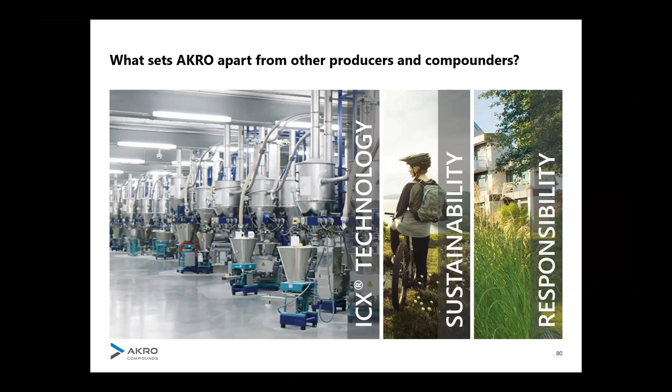The third and last topic I'd like to mention is the ICX technology. ICX technology is our in-house technology to compound, and this is the same in every location, every production site we have. We are running on the same lines in China, in Brazil, and we will run on the same lines in the US. The special thing about it is that these extrusion lines are produced by our sister company, Feddem, so they are also tailor-made for our needs, for our materials needs, and for our customers' needs.

Okay, so that's for AKRO. Now I'm happy to share some interesting new serial applications. When I was asked by Houston if I could give the presentation again, I said okay, I'll just take the old presentation which I showed during Chinaplas. But then I realized that in the last 6 months, maybe a bit more, we had so many new great applications that I'd like to share with you, so I had to do more or less a completely new presentation.

One very important field, and it was already mentioned before, is battery electric vehicles. It's like a perfect match, polyketone and battery electric vehicle applications, and there are good and many reasons for that. Looking into thermal management of a battery electric vehicle, it is completely different from a combustion engine.

In a combustion engine, you need more or less to cool the engine while the car is running, temperature control the engine. In a battery electric vehicle, you also need to take care of the temperature of the battery while it is standing outside in winter times, so it must not go below a certain temperature. You must control the temperature in your fast charging unit, and you must control so many different converters, inverters, and on top of that, the heating, ventilation, air conditioning.

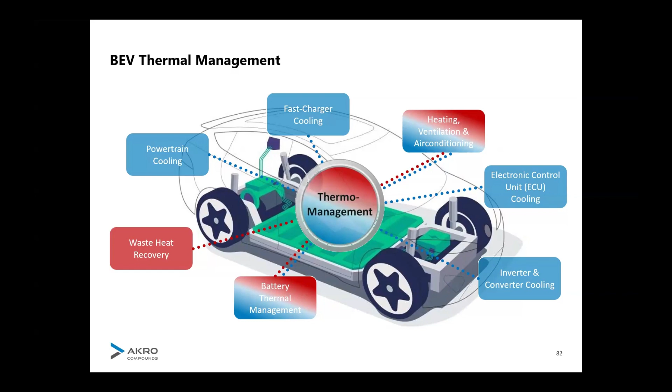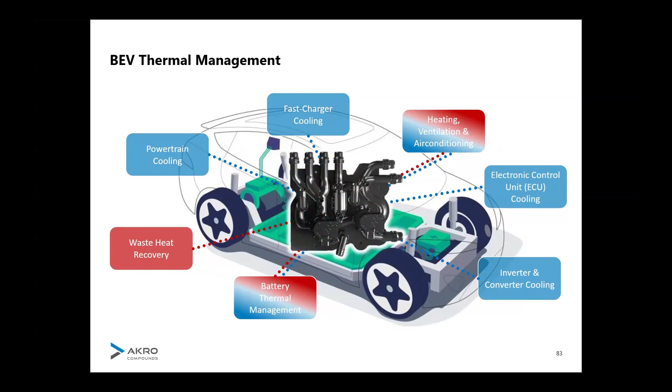So you see immediately that there are many jobs to be done, and therefore you have very complex modules. They need to be very highly sophisticated because you do not want to cool or control all these different components at the same time, because you only want to control what is really needed to not waste energy. And therefore you have these manifolds, and these manifolds are quite complex parts. So many of them are made in semi-shell technology, where you have two layers or one base plate, and you weld different channel components on top.

And then you can use different welding technologies. You can do laser welding, vibration welding, ultrasonic welding, whatever, depends on your part design. But what you will get in the end are weld lines somewhere.

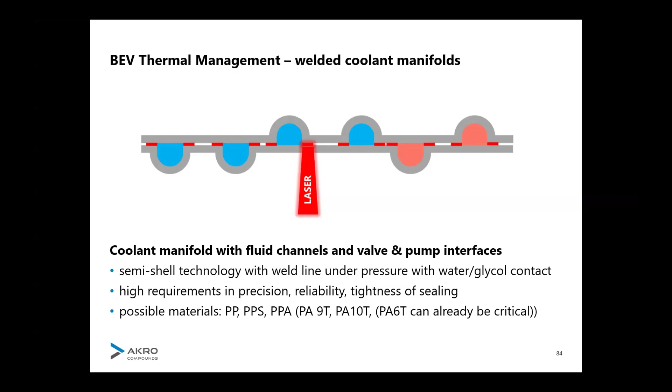Weld line in combination with temperature, in combination with the cooling agent, and over quite a long lifetime, you have in these parts really high requirements regarding precision, reliability, and of course the tightness of these weld lines.

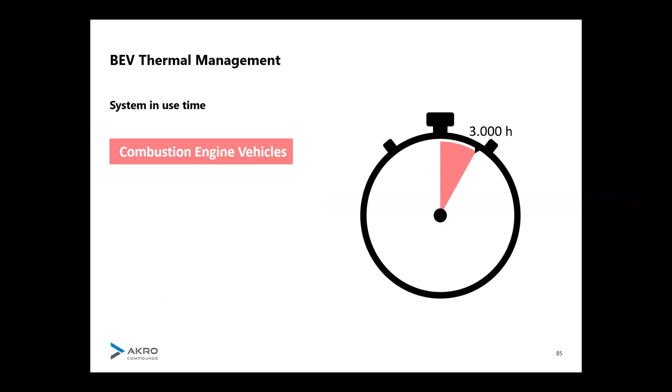I already mentioned the system in-use time in a battery electric vehicle is much different from combustion. In combustion engines we test for 3,000 hours. Now if you look into battery electric vehicles, 15,000 would be nice. They go even to 30,000, which is already 10 times the in-use time compared to a combustion engine.

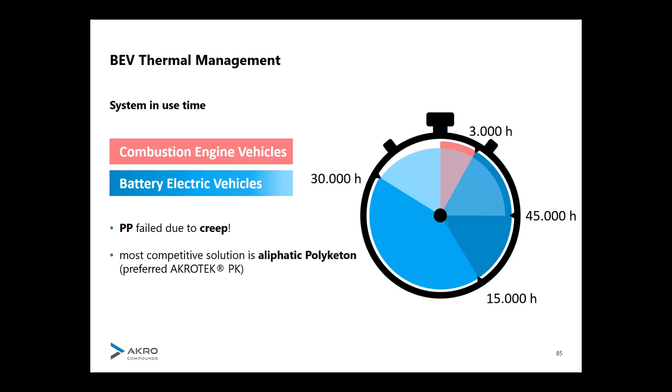Therefore, we see polyketone as the most competitive solution, and I can give you a recommendation, use AKROTEK PK for these kinds of applications. So we heard already a lot about hydrolytic resistance, about the test results.

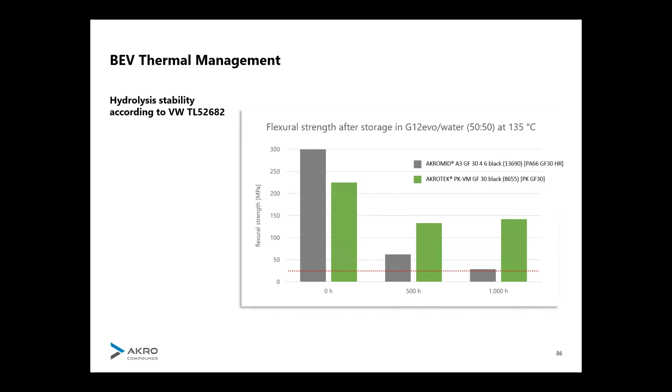I'm glad that the numbers we saw so far match with what I prepared, but we do not need to go through this chart again.

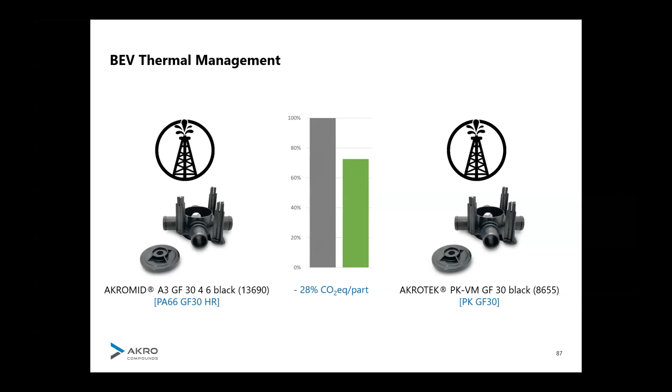Another topic that is often discussed and that reflects kind of a fear of our customers is the cross-linking behavior of polyketone when processed in an injection molding process.

We use the injection pressure as an indication for the change of the viscosity, and this reflects the cross-linking behavior in the mold. In the beginning you were quite on a similar level, and then we started to increase the dwell time just to make the material suffer a little bit more under temperature and to activate the cross-linking process.

And we could see by increasing the residence time in the injection molding barrel, this is standard polyketone, it really goes up a bit, and you can even do it further. We had a stable condition here, and then we increased it by another 5 minutes, and it went even higher. So there was quite a logic behind it.

So we were able to develop our own stabilization package for polyketone. As you see, it increases a bit, but compared to an unstabilized polyketone for the processing, we were really able to reduce this behavior. And that is really well appreciated by customers.

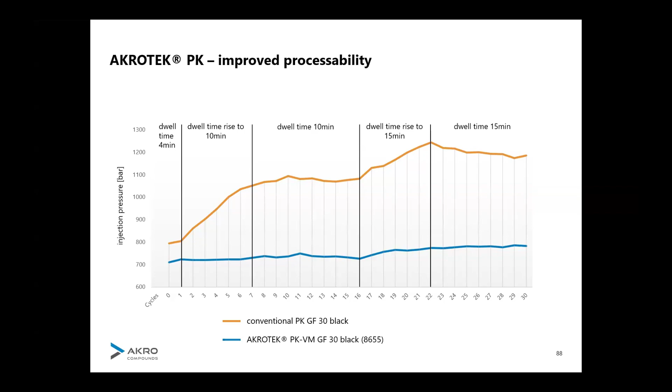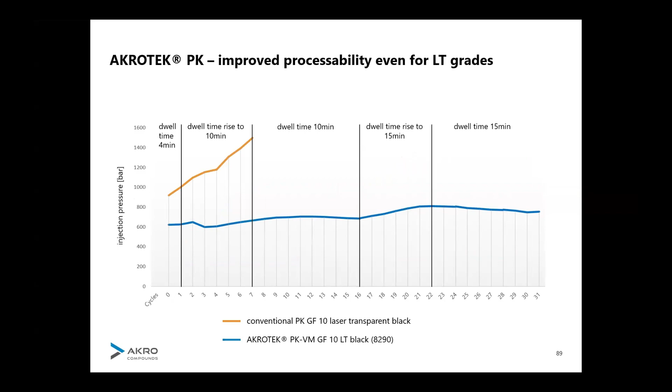And this is not only working for standard grades, but it's also working, for example, for the laser transparent grades we also use, especially in these kinds of thermal control units.

Okay, now coming to real parts. This part I was not able to bring today, but you can see it on our booth in Hall 6, because it is attached to the booth. This is a very complex thermal control unit.

Well, we explained what is the task of this part, but what are the values for the customer. First, by bringing all this together in one module, we have a strongly increased energy efficiency, but also installation space efficiency. And this was tested for a lifetime of 30,000 hours.

And we see here we were able to bring 26 connections into only one part in the end. And of course, it's easy to acknowledge that this is a much more sustainable solution already material-wise, and also compared to different materials like nylon 6,6 or even more expensive grades like PPA or PPS.

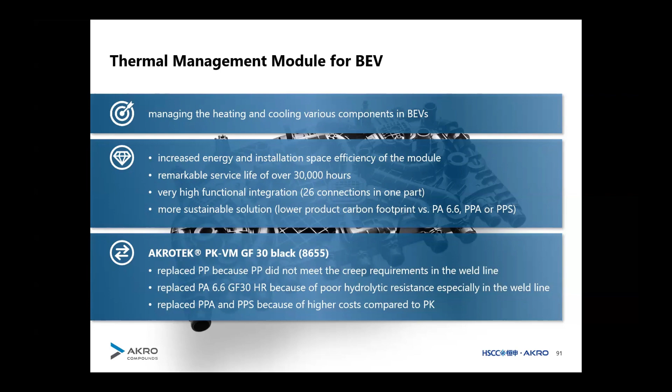So yeah, we use here a 30% glass fiber reinforced polyketone, and in the beginning the idea was to make it in polypropylene, but it simply did not work because of creep. And with all these many weld lines, over the long time with temperature, you also get leakage when using a nylon 6,6 glass fiber reinforced, and PPA and PPS would most likely work, but it's simply more expensive. So you go for the polyketone solution.

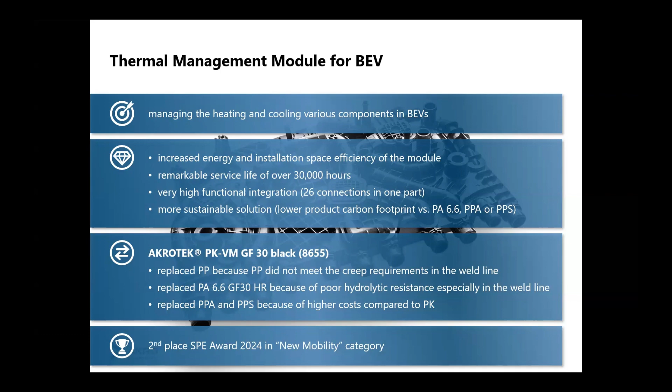This part won the SPE award last year. No, it was in second place, sorry, in the category new mobility. And now just last Monday, so about one week ago, this nice part here won first place at the SPE award in the same category, new mobility.

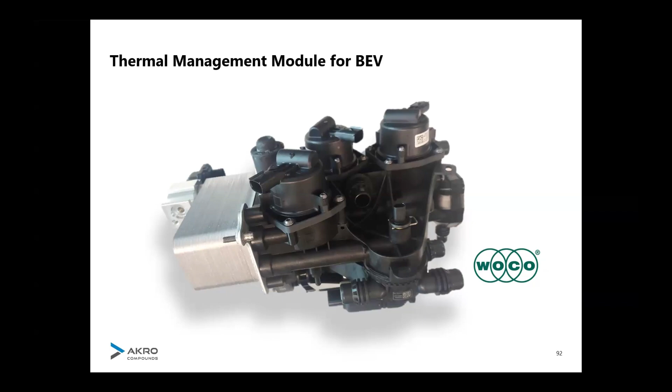It's also a thermal management module. It's for the Lucid Gravity. So, you know, before, the first car was the Lucid Air, and I will show you later what the solution was in the beginning. And now you already see the next step. And so here we have the same function. We replaced 11 parts by one part.

And the weight saving, and that is interesting, is not only coming from reducing parts, making it smaller, but if you look at the whole system in your car, of course, if you have less components, you have less tubes in between, and you have less cooling agent that you need in your whole system. So looking at the weight saving of just the part, we talk about roughly 30% saving, but on top, you could eliminate 10% of the whole cooling agent in your system. I don't know the exact numbers, but imagine you had 5 liters before, and then you have only 4.5 liters left. You already save 500 grams just in cooling agent.

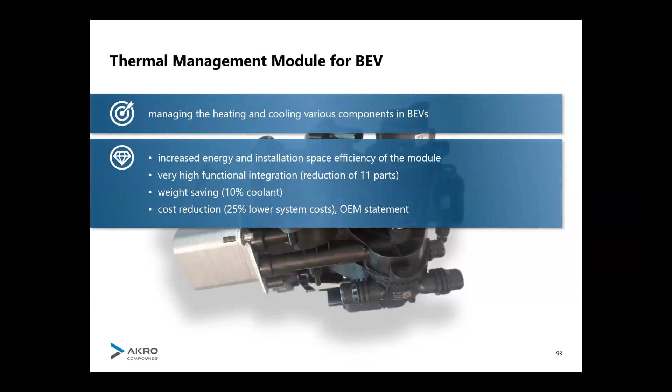And another interesting number was the cost reduction of the whole unit in the end. And that is a number we received from Lucid as an OEM. So it's not so often that you get this kind of information. They were able to reduce cost for the whole system by 25% compared to the solution before. So, well, the reasons why PK was used are the same as for the other module.

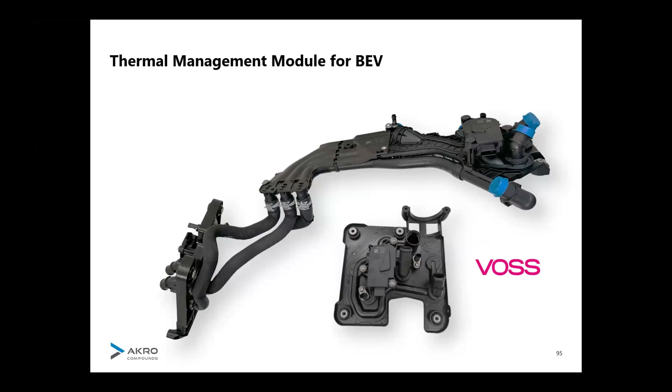A similar application, also for the PPE platform, the Premium Platform Electric from the VW group, is from the company Voss. And here they use a laser transparent grade because it has an easier geometry, and you can go with laser transmission welding. And here the special thing about this grade, you see by LT, laser transparent, is that you have improved laser transparency. Also, we have a stabilized material and can maintain a very good laser transparency even after the injection molding process.

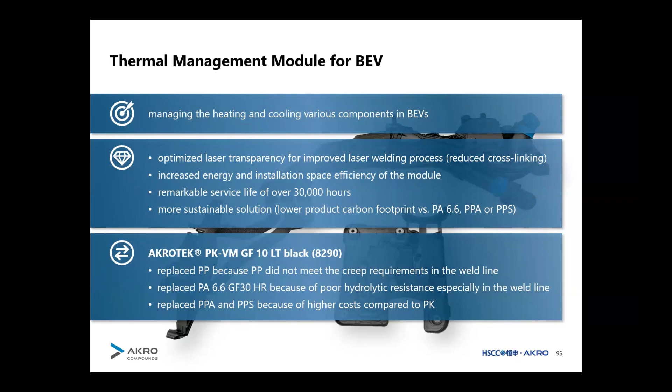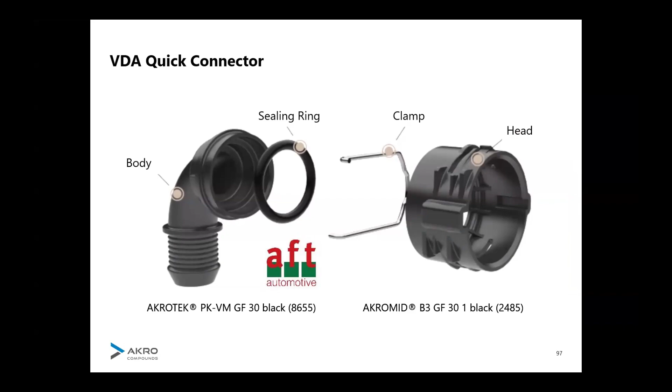So coming to a different kind of part, but also in a similar application. Also in cars, not only in battery electric vehicles but also in combustion engines, you need quick connectors, simply to connect pipes to devices or to connect the system. And here it was a very intelligent move by the company AFT. They thought of this quick connector a bit differently. They split it into 2 parts, separating the requirements you have.

So this area, the lighter gray part, is in contact with the cooling agent, and the darker part here outside is never in contact with the cooling agent. So you can use, let's say, cheaper material for this application, and you only need the high hydrolytic resistance in the area that is in contact with the cooling agent. And you have combined it with a sealing ring and with a clamp. But in the end, you can really focus on mechanics, on toughness in this area, and on price.

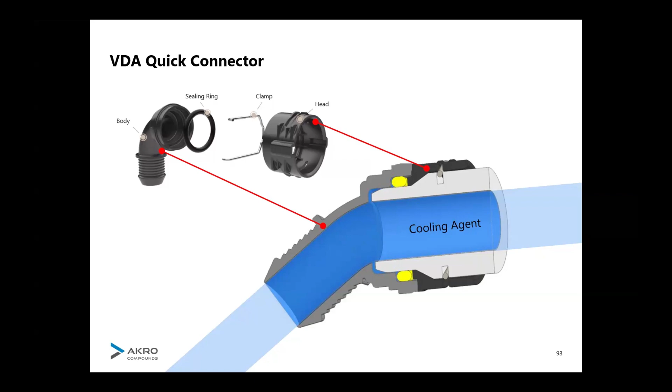And you also have higher functionality because you can adjust the angle from head to body in 10 degree steps. So where normally you would have needed a new mold for every different angle, you just adjust them slightly differently. So it's also an additional benefit.

And now something important comes into play, which is coming from Asia right now. Chinese battery electric OEMs use new cooling agents. They realized that if the cooling agents are conductive and you have an accident and the cooling agent drips on your battery, the higher conductivity increases the risk of a fire or short circuit. So they are going now for water glycol mixtures that have very low or no electric conductivity. These cooling agents are more aggressive, so we need to make sure that our materials are resistant against these special cooling agents.

And luckily, the polyketone is resistant. But the second thing is, we also need to be careful as a compounder to create materials that do not release any ions into the cooling circuit. Because if we put the wrong stuff in our formulation, then over the lifetime, and you saw there's a long lifetime, long use time, we can run into problems, because all of a sudden this non-conductive cooling agent becomes conductive.

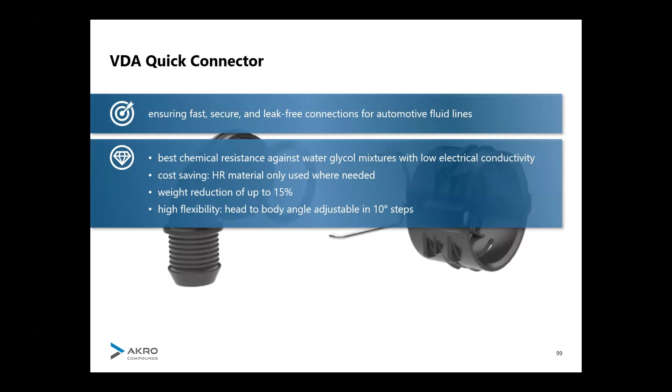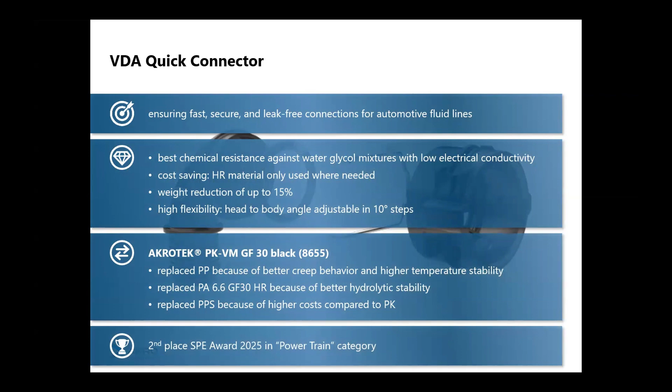And also with our PK VM GF30 black, we fulfill these requirements. Therefore, that was the decision why this material is used for these quick connector applications. These connectors also won an SPE award a week ago, second place in the category powertrain.

Now we learned from the presentation before how important flame retardant requirements are. And this piece is a safety cap in the MEB from VW Group, the Modularer E-Antriebs-Baukasten. It's used in all these ID3, ID4 cars. And this was made in nylon, nylon 6. And now, because of the propagation test and the nail penetration test and all the tests you have, they decided to move away from the polyamide to polyketone.

And then, of course, there's a reason why it's orange, that you have this signal color, so that in case of an accident, the firefighters or whoever knows where high current is, so this should also remain a signal color and not become brown or something like this after a while.

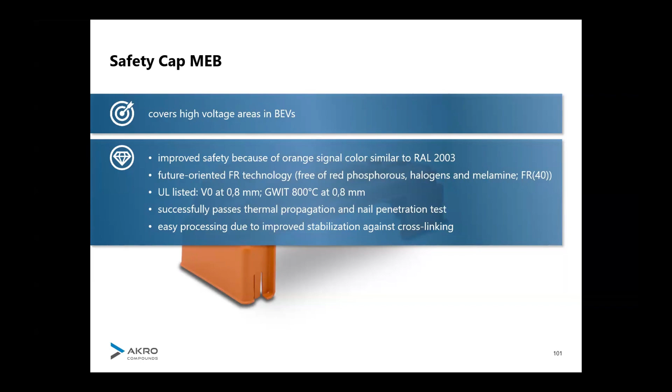And that is not only true for polyketone, but that is true for all flame retardant materials we have at Akro-Plastic. They are always halogen free. They are always free of red phosphorus. They are always antimony trioxide free. They are always melamine free. So just to give our customers the security that whenever they buy an FR material from us, it is kind of future proof. So our flame retardant grades are always marked with an FR.

Excuse me. So we do not only have applications in the automotive industry, we also have many applications in all different areas. And the reasons why polyketone is used are exactly what we heard in the first presentation. Like for conveyor belts, if this is in the food industry, you have food approval, you have a good tribological behavior, you have a high chemical resistance that is needed in this field.

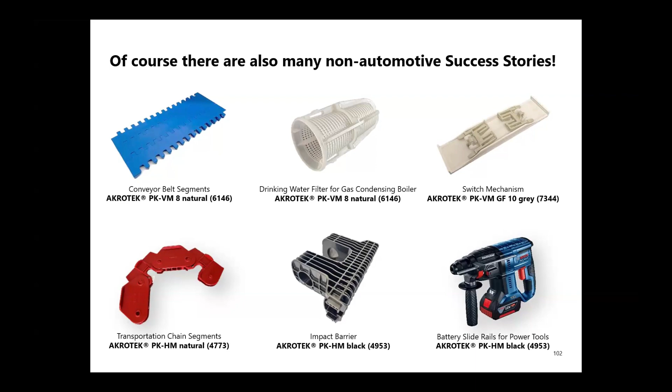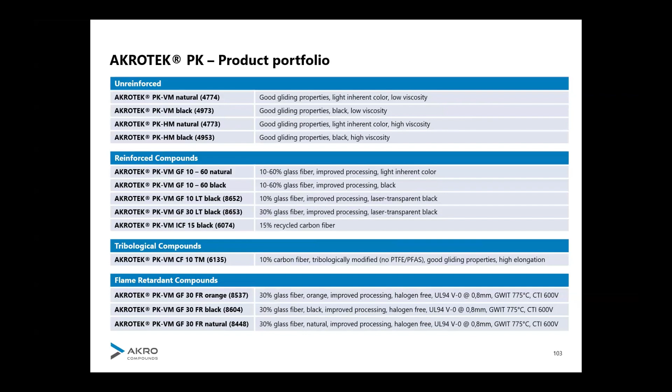So I'm not going through the portfolio, but you see we have unreinforced grades, we have reinforced grades, especially tribologically modified grades, and we have flame retardant grades. And we have special grades with approvals for the food industry and for drinking water. Those were the examples I brought today. But as I said, we have more at our booth.